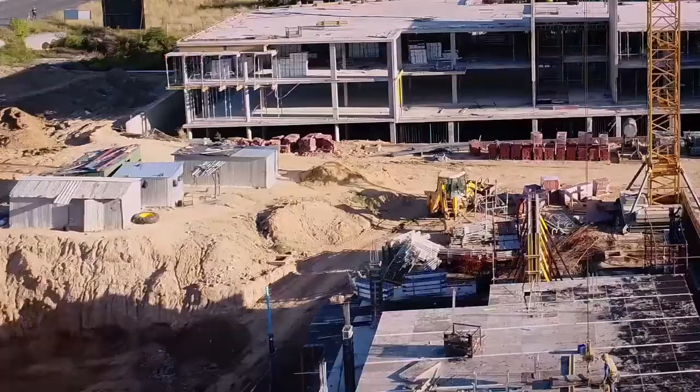Center proudly presents the eGODINI project, a world-class development in the City of Kings. A report of progress. When great minds come together, great things are possible. What started as a dream is steadily becoming a reality, and the meticulous planning is beginning to take shape.

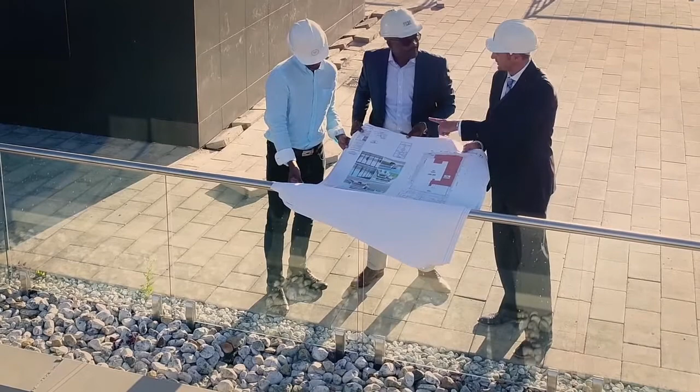The saying goes, Rome wasn't built in a day. Let's hear from the key players as they share with you some insight into the magnitude of this landmark project. My name is Wisdom Siziba. I'm the Acting Deputy Director of Engineering Services in charge of town planning and the project manager for the eGODINI redevelopment project. This project started in 2008 and we went through the processes up to 2017 where we are now implementing the project.

The vision of this project is to unlock the true potential of eGODINI, to create a legacy for Bulawayo, to uplift the community of Bulawayo. We want to create an integrated system in line with the Bulawayo Operative Master Plan, the Strategic Plan and the Public Transport Policy. eGODINI has been neglected at the moment.

The infrastructure needs a lot of upgrade and there's a lot of congestion at eGODINI, and there's inadequate toilet facilities, and it is not user-friendly for the children as well as the disabled that are trying to use eGODINI. It is not very safe because there is no lighting system there at the moment, and even if you look at it, it is an eyesore at the moment. The list goes on, but it doesn't have to be this way.

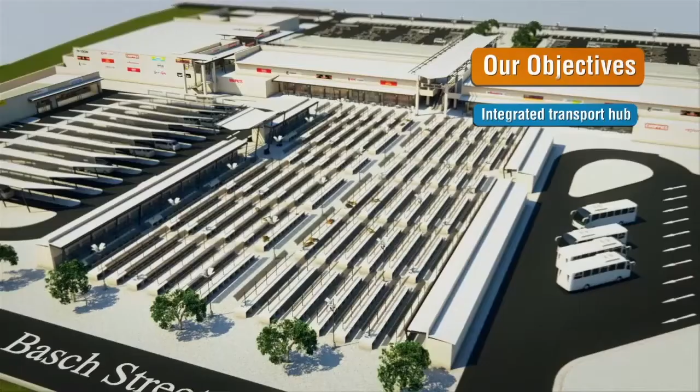There was a dire need to radically transform the site, so there was need to take a bold move and redevelop eGODINI. We are expecting to achieve 7 key points. 1, a properly managed integrated transport hub. 2, an improved local economy. 3, an investment in the city.

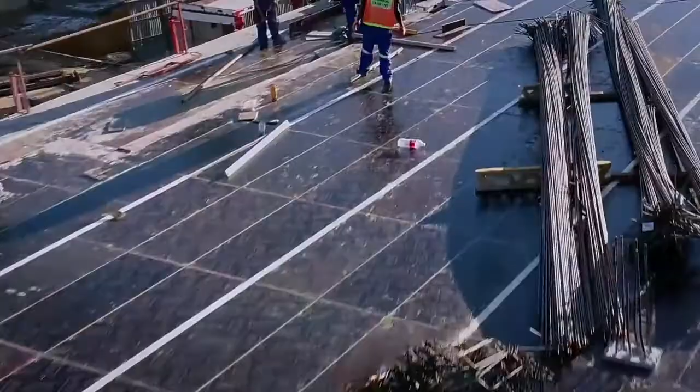4, creation of jobs during and after construction. 5, positive impact on the downstream industry. 6, world-class road travel experience for commuters. The 7th being a better and a livable city for the residents. We needed to find a developer with the capability, the passion, and who shared the vision with us. Hence, we chose Terrace Africa.

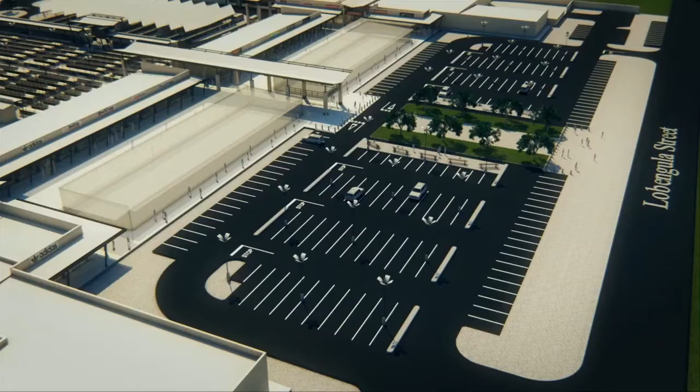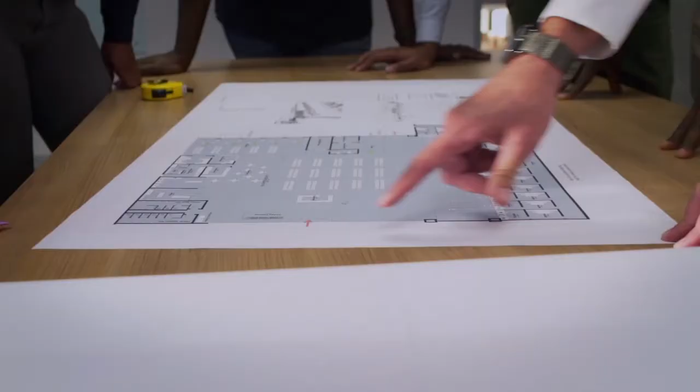The eGODINI project site is on the western fringes of the Bulawayo CBD and is bordered by Lobengula Street on the east, Basch Street on the west, 8th Avenue Extension on the south, and 6th Avenue on the north. The site encompasses a significant open area that is currently utilized by local minibus taxi operators. In terms of our development concept, we conducted a contextual and site analysis which revealed that the site is perfectly positioned to serve the primary purpose of being an intermodal transport hub.

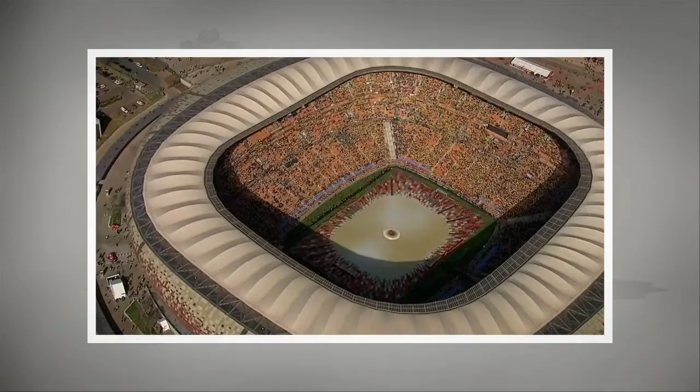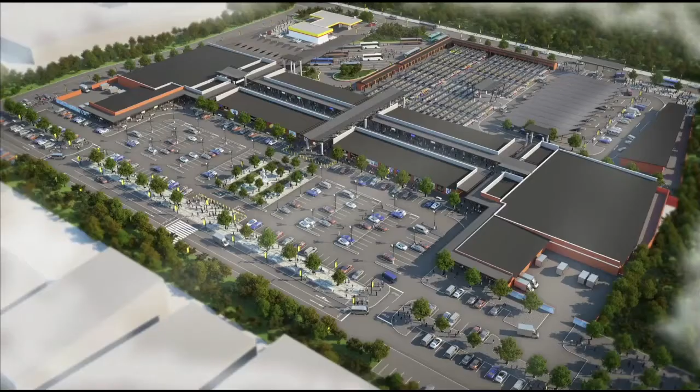When embarking on a project of this magnitude, experience is key. Having worked on the redevelopment of OR Tambo, King Shaka, and Cape Town International Airports as part of the 2010 World Cup infrastructure upgrades, we gained extensive knowledge about the design and operation of some of the best public transport facilities in the world. One would be forgiven for thinking these facilities are merely public transport facilities. However, this isn't the case, as they play a much greater role.

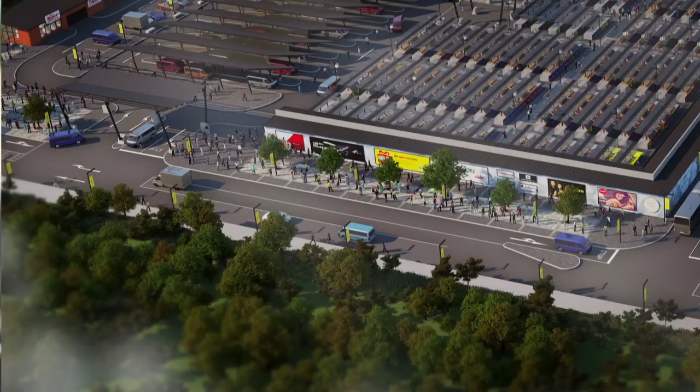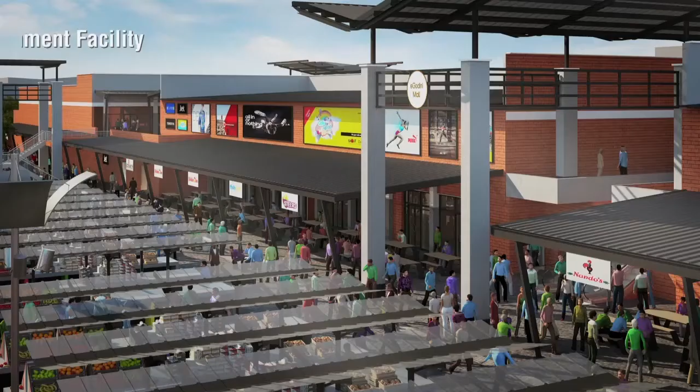They are actually shopping venues and entertainment centers where the public catches airplanes, trains, and buses. This is why so many people gravitate to such places. It is the same vision that we see for the eGODINI development. As a secondary function, the site provides an ideal opportunity to incorporate retail, commercial, and entertainment facilities which will contribute towards the overall commercial viability and success of the redevelopment.

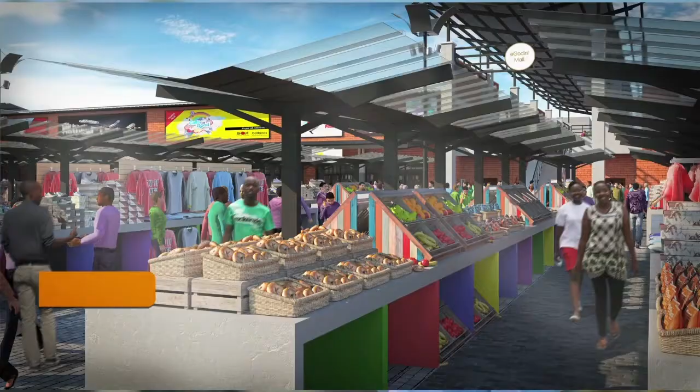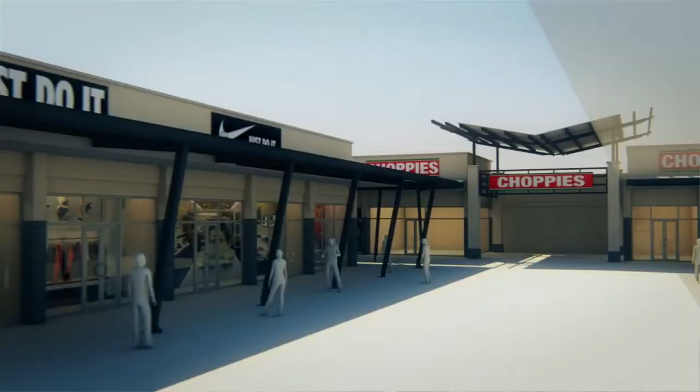So what is our development goal? We intend to redevelop the eGODINI site into a modern, orderly, safe and convenient intermodal public transport hub that will be integrated with a retail shopping center. This will provide public transport users and other visitors to the city of Bulawayo with a fully integrated public transport, retail, commercial and entertainment experience, which will be the main focal point of retail and public transport activity in the whole of Bulawayo.

We have just finalized an almost 3-year development planning process. We now have a project design that will optimally balance various key strategic design objectives. But of course, there have been challenges we have had to contend with. Our very first obstacle was to comprehensively address the fact that technically the eGODINI site is extremely challenging from both an engineering and architectural perspective.

The topographical structure of the site is split into 2 dissimilar levels, the differences between the high and low points being significant and occurring at staggered intervals and elevations. Our next major challenge was how to ensure minimum inconvenience to informal traders and public transport operators at the site, while complying with construction health and safety requirements.

The relative lack of formal employment in Bulawayo means that an increased number of people are now earning a living through informal trade. The council has proposed temporary relocation of informal traders and taxi operators to other sites during construction works, whereafter they'll be brought back to the completed site. We are therefore going to implement a phased development approach so as to bring back informal traders and taxi operators onto site as part of phase 1.

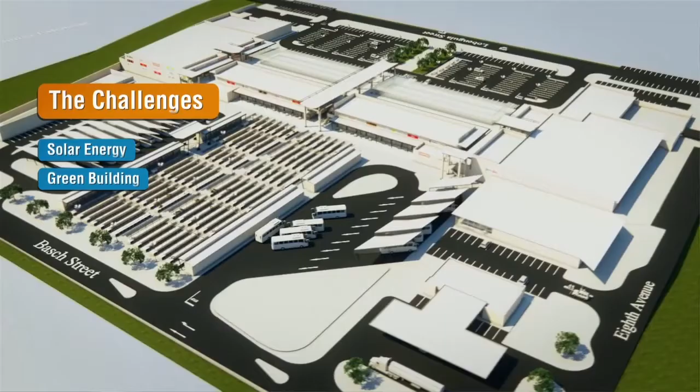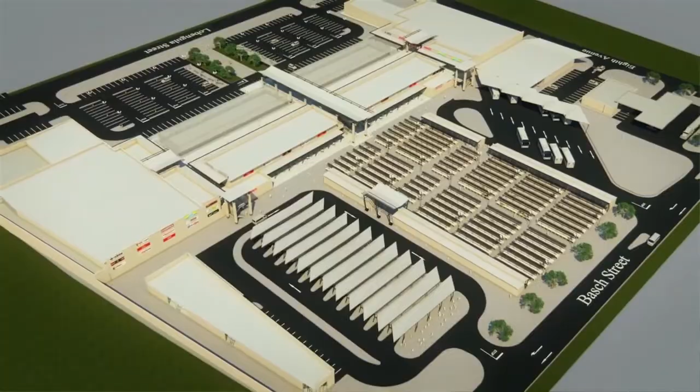Having confirmed a technically feasible design solution for the development, our next challenge was to stress test the financial viability of the technical design solution. The unique combination of the significant capital investment required for the project due to the complex engineering and architectural challenges and the prevailing economic environment can easily conspire to bankrupt any developer of this project.

We therefore undertook more than 2 years of demographic studies to design and assess the optimal financial potential of the site. We now have a detailed understanding of what tenant mix will work in which phase of the development, what market rentals different types of tenants can afford to pay, traffic counts and trends, and why certain existing retail developments are not working as well as they should be.

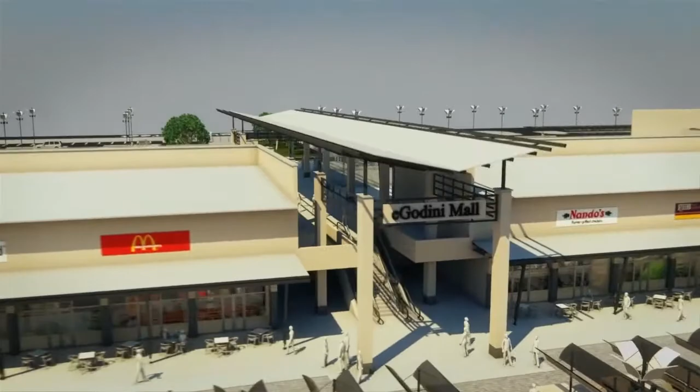This is the intellectual property that we bring to this project to ensure that it is successfully delivered for the residents of Bulawayo. This project is a very special project to us as Terracotta. Our shareholders have jointly developed more than 50 shopping centers in South Africa, creating jobs and changing the lives of hundreds of thousands of South Africans. As professionals from Bulawayo, we want to do something special for our city, the City of Kings.

We were tasked to design a contemporary lifestyle precinct that would easily be integrated into the existing urban fabric as well as articulate the cultural context of Bulawayo. The landmark development needed to encompass 3 distinct facilities: an innovative retail shopping centre, a comprehensive intermodal public transport hub, and an iconic remembrance garden venerating the great King Lobengula.

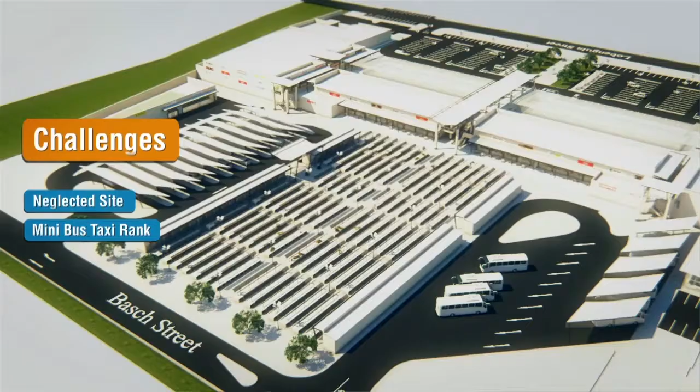The layout for the eGODINI precinct is designed with an historical context in mind, but of course we faced major challenges. A neglected site that has not been sustained for the last few decades. The minibus taxi rank. We decided to formalize a modern, organized and sheltered taxi rank that will provide convenience for taxi drivers and commuters. The informal traders facility, with over 1,100 traders, needed to be relocated to a centralized point. Hence, we strategically positioned the facility to ensure maximum foot traffic and efficient flow of pedestrians.

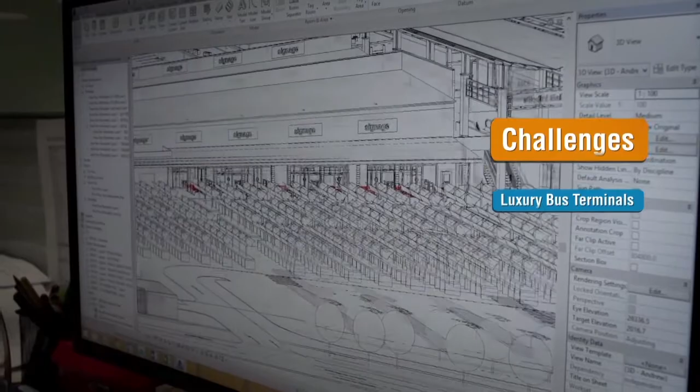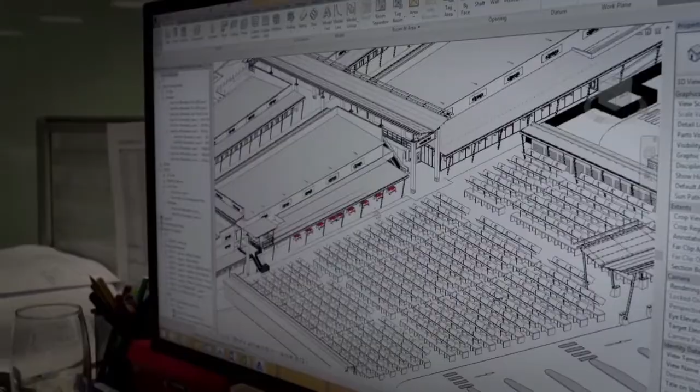The bus terminals. We decided to centralize all intercity and cross-border operators to a single luxury bus terminal with state-of-the-art facilities, a first for Zimbabwe, providing convenient, streamlined access and efficient service. The route planning. It was necessary to redistribute and redesign the public transport service routes, improving the efficiency of traffic flow. The fast food facilities are positioned to get maximum exposure to the general public and easy access to a range of fast food outlets.

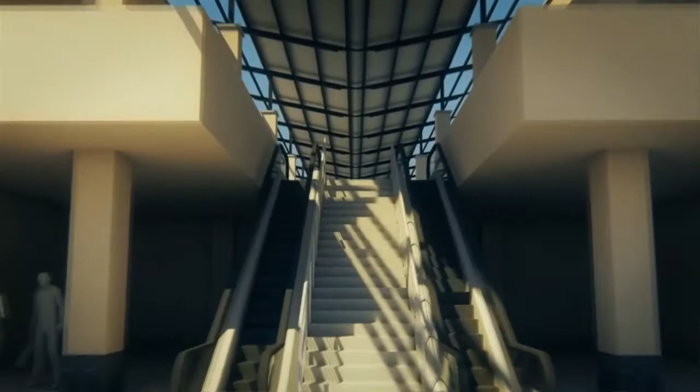The eGODINI shopping centre is located in the heart of Bulawayo. It is positioned on the upper level of the site, allowing for an abundance of natural light, easy access, minimizing design costs, and provides a stylish lifestyle shopping experience. The iconic Nkosi Lobengula Remembrance Garden is a monument with cultural significance for the people of Bulawayo. The design will be spearheaded by the energy efficiency principles and takes into account sustainability and green building philosophy. The ultimate outcome is to see the eGODINI site become competitive and grow a sustainable urban economy that supports quality of life and inclusion of all its citizens.

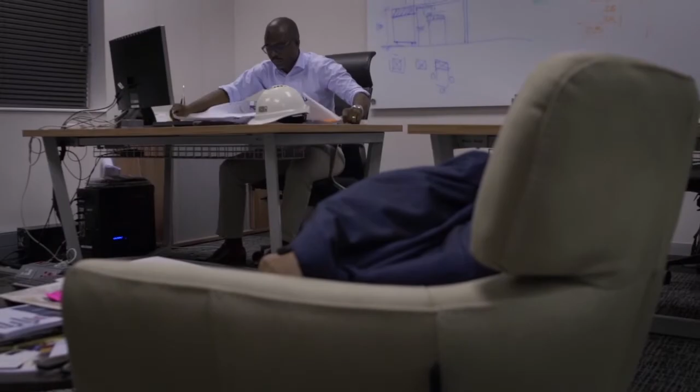My role is essentially threefold. I oversee the civil, structural and electromechanical engineering aspects of the development. The civil scope involves designing the required supporting infrastructure, for example, the platforms, sewer, stormwater and roads. The structural scope involves foundation designs and structural schemes to facilitate the architectural design. In essence, we are designing the skeleton so that the body can support its weight and other forces that act on it. In terms of the electrical scope, power is essential. We need to ensure the electricity requirements of the development are met.

Interestingly, the name eGODINI is a local term which means hole. The current site is in a hole or a cut. Hence, this inspired us to implement the concept of platforms separated and supported by a 4-meter high structural reinforced concrete retaining wall. It's important to note the site conditions and terrain unearth a number of major challenges. Bulk earthworks is the biggest challenge. The site terrain is not flat, as it is sloped with a ±5-meter difference between the highest and lowest points. We decided to adopt a major retaining wall separating the upper and the lower levels of the development. The cut and fill exercise will minimize the volumes of importing backfill material.

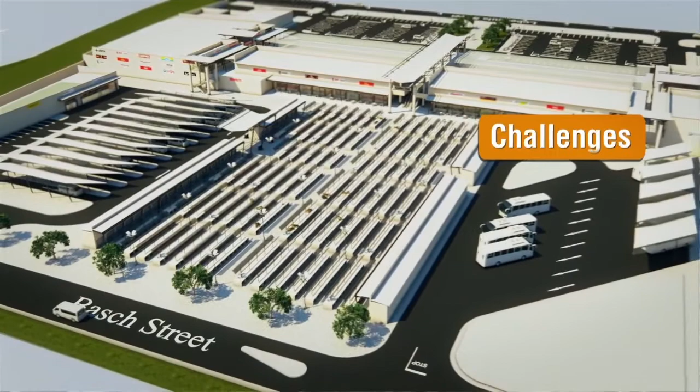Adequacy of water supply is an issue. We have calculated that the current 315mm diameter municipal main feed to the site can support the development. A concern, however, is that the city of Bulawayo faces erratic water supply problems. To combat this, we are sinking bores to feed into the on-site storage tanks. In order to address stormwater management and sewer reticulation, our design entails rerouting the current scheme. The total length of water, sewer and stormwater reticulations is 4.7 kilometers, and with Barbourfields Stadium perimeter being 540 meters, the new reticulation is 9 times the perimeter of the stadium.

Stormwater will be managed by a combination of surface flow and an underground piped system. And we have accounted for solid waste management, which will be collected from designated areas on the premises by municipal trucks on a daily basis. Other issues such as sustainability, green solutions, energy efficient lighting, air conditioning and water heating have all been addressed to ensure this landmark development is engineered to perfection.

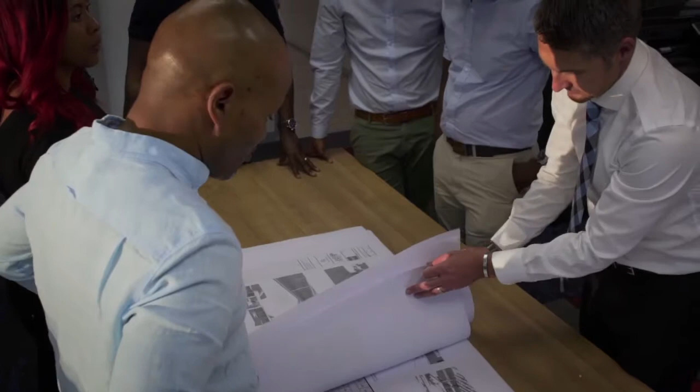In a nutshell, we are responsible for designing sustainable mechanical building services for the development, namely heating, ventilation and air conditioning systems, fire protection systems, and water services, thus drainage and water supply systems. There are 3 major challenges we face. Firstly, the unreliable rainfall patterns for the city. Secondly, total owning costs for the plant, which includes capital and running costs. The running cost may go up due to high cost of electricity and reliability of supply.

And lastly, maintenance. We carefully considered these key issues and addressed these problems using the primary principles of sustainable building services design for HVAC and water services. And this we did by reducing the carbon footprint of the project, reducing potable water usage, building using sustainable materials, design that is able to cope with future climate change, giving a positive contribution to the community, and lastly, sustainable in operation.

With regards to the fire engineering, our aim is to provide the following key benefits: life safety for shoppers, shop owners and workers, property safety, minimize disruption to business operations, minimize damage to the environment, and of course, easy access for fire and rescue teams. We've heard from the professionals. Let's see what the people think.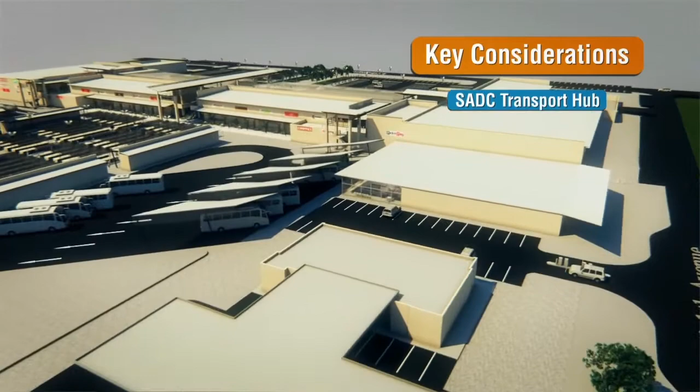Currently, there is no real bus station. It's fairly chaotic. Buses just stop in random places on the street. It's not ideal. There needs to be a change. What would make a perfect bus station? A transport hub for the SADC region. This development will enable easy connection for passengers. For example, passengers arriving from South Africa will be able to easily transit to other neighboring countries, such as Botswana, Zambia, Malawi, Namibia, Mozambique, and even Angola.

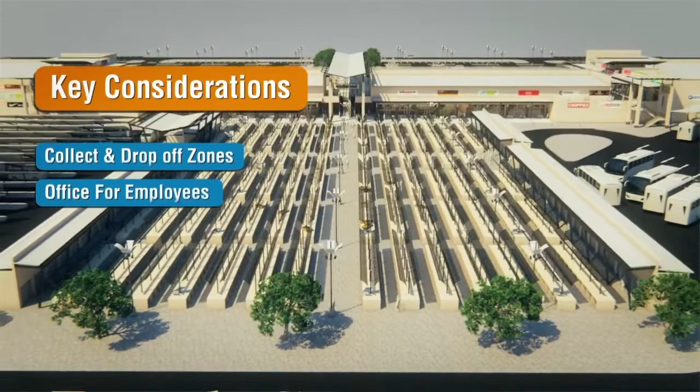Simple, practical things. Proper section for buses to collect and drop off passengers. An office for the employees. A ticketing booth. A check-in counter. A departure lounge. A luggage section. Things that will make it convenient and comfortable for our passengers. Clean facilities are a must. Security to make sure everyone is safe. And of course, you can't go anywhere without fuel.

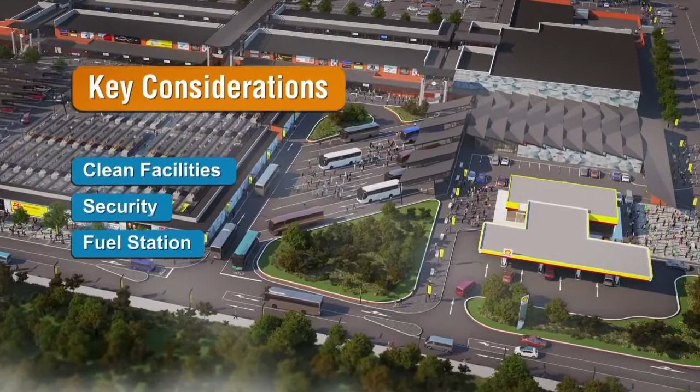Hence, a fueling station that is close by so that we at Mzansi Express can offer a better customer experience. These are the great things that this eGODINI development has to offer, which is the reason why we at Mzansi Express are looking forward to the future.

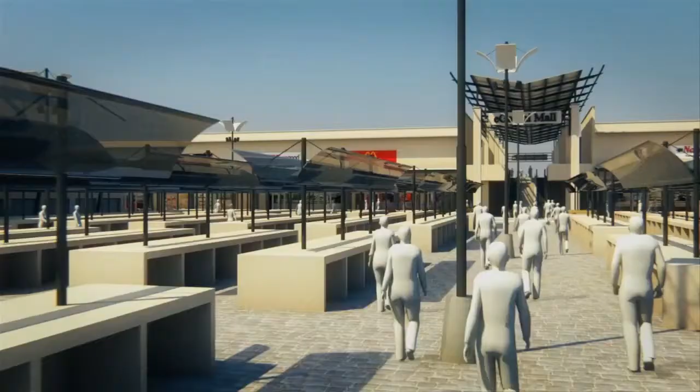Our wish for Bulawayo is to be a world-class city. eGODINI project is a move towards achieving a world-class status. eGODINI project is indeed a landmark project for Bulawayo and Zimbabwe. Immense progress is being made at a steady pace. The relocation plan for vendors and commuter omnibuses is in place. Survey has been concluded to consolidate all stands. The development master plan has been approved.

Detailed architectural and engineering drawings are at an advanced stage, and we now expect to do site handover in the near future. This is quite an exciting time, and I feel very proud to be part of such development in the great city of Bulawayo. Certainly, this is an ambitious and landmark project that will no doubt have widespread benefits for all our taxi operators, daily commuters, informal traders, luxury bus travelers, visitors, and residents of the beautiful city of Bulawayo.

We need to be conscious of the fact that the development of this magnitude does not simply appear overnight. This is not a sprint. This is a long, complex journey that requires dedication, planning, and hard work. We are heading in the right direction and well on our way to turning the dream into a reality.

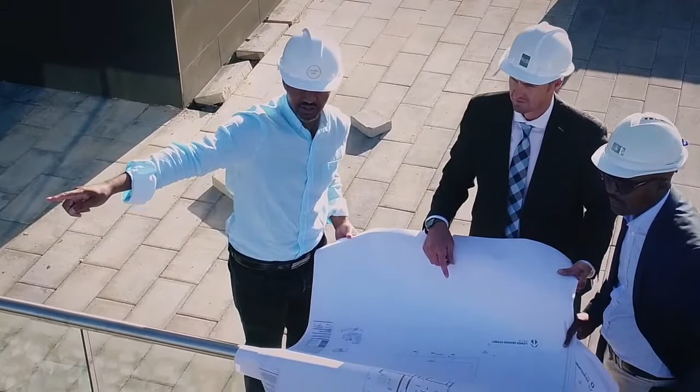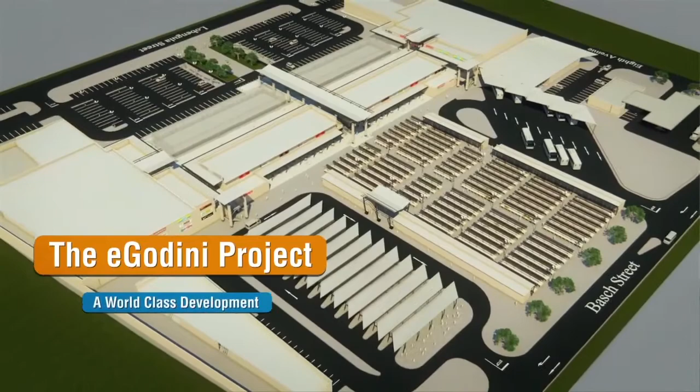It is Bulawayo's time. A site with a complex set of problems, a team with a bold set of solutions, and an iconic project that will change the lives of the people and establish Bulawayo as a world-class African city. The eGODINI project, a world-class development in the City of Kings. Proudly presented by Terracotta.

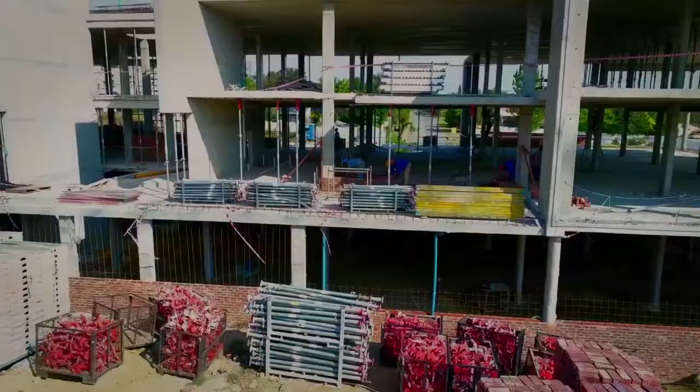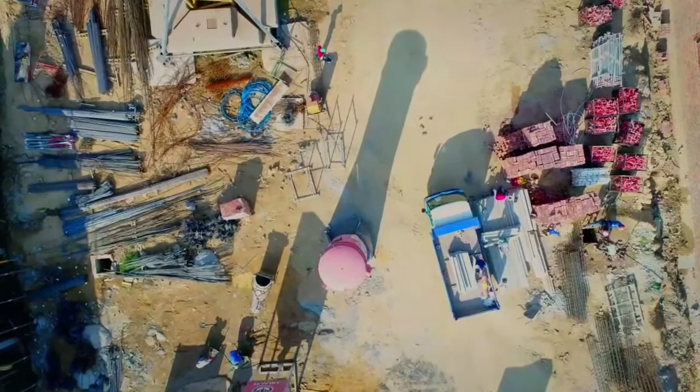Terracotta proudly presents the eGODINI project, a world-class development in the City of Kings, building a legacy by changing lives and impacting the community for the better. Bulawayo is the second largest city in Zimbabwe and is the industrial capital of the country. The city is strategically located at the center of the road and railway networks of the SADC region. It is therefore a crucial interconnecting city for all forms of transport, interlinking all major economic hubs in Southern Africa.

The eGODINI site is located in Bulawayo Central Business District. The site is approximately 56,228 square meters of massive potential. Our aim is to unlock that potential to the benefit of every stakeholder. Currently, the site is used as the main local minibus taxi rank for all taxis operating into and out of the CBD, with 1,047 informal traders, 2,015 minibus taxis, and businesses operating from more than 15 permanent buildings across the site. The problems cannot be ignored.

The site has been neglected over several decades. No infrastructure upgrades or maintenance. Informal traders, their stock and customers are exposed to unhygienic conditions. No protection from weather elements. No on-site storage facilities for informal traders, increasing the cost of doing business. The taxi rank is disorganized and chaotic. No clear demarcation for pickup, drop-off or route areas.

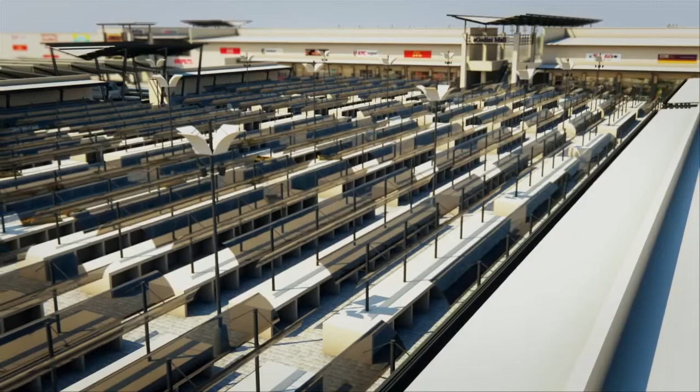Our objective is to redevelop the existing eGODINI into a modern, safe, and convenient intermodal public transport hub, combined with a retail shopping mall that collectively will provide public transport users and other visitors to eGODINI with a single and fully integrated public transport, retail, commercial, and entertainment experience. Our motivation is to touch the lives of every individual by improving the site. To get to the heart of the matter, we spoke to the ordinary man on the street and carefully considered the problems they face. This is what inspired the entire design.

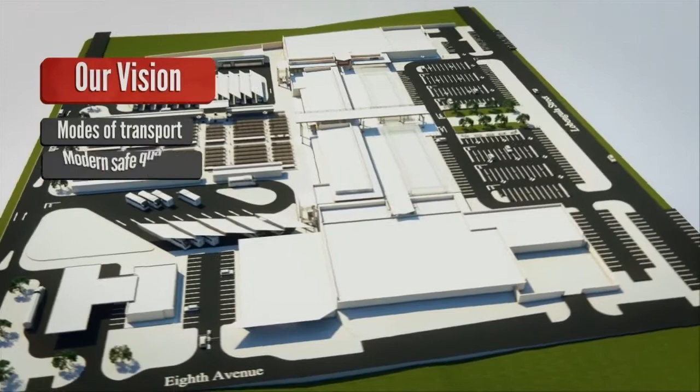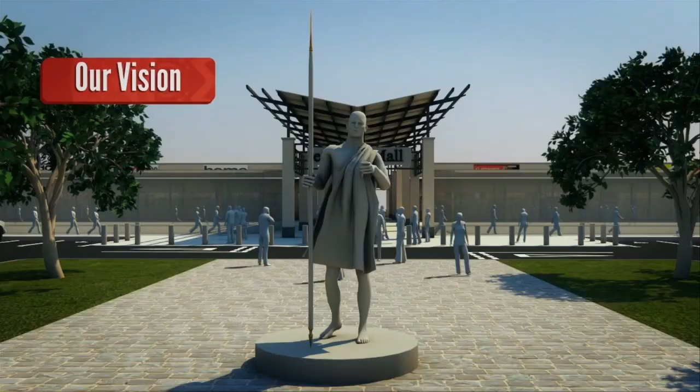So what is our vision? Let's start by integrating various modes of transport. Let's create a modern, safe and quality environment for all users. Let's provide retail, commercial and entertainment experiences. We want to link eGODINI to the rest of the Bulawayo CBD and create an exceptional city monument, the Inkosi uLobengula Remembrance Garden, which will include pristine pedestrian walkways, revitalized landscaping along Lobengula Street, unique street furniture, public art and directional signage.

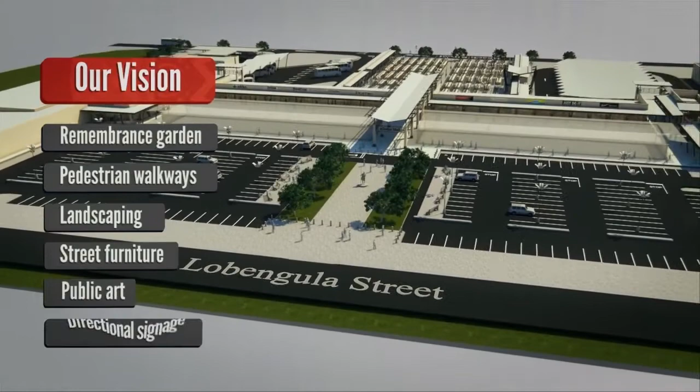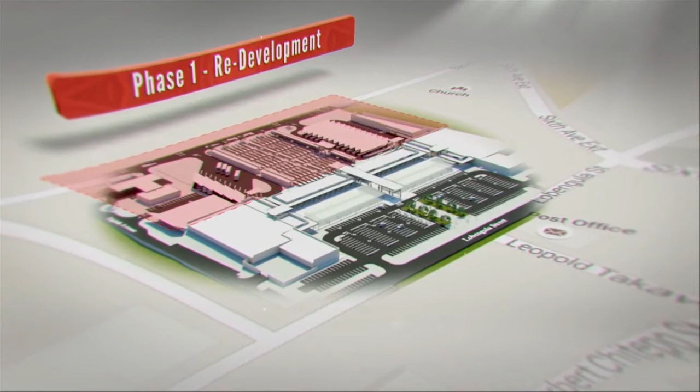Let's move forward together. This is our vision for progress. Phase 1 of the redevelopment takes place at the basement level of the site. 25,000 square meters make up the transport hub and comprises 4 vital components.

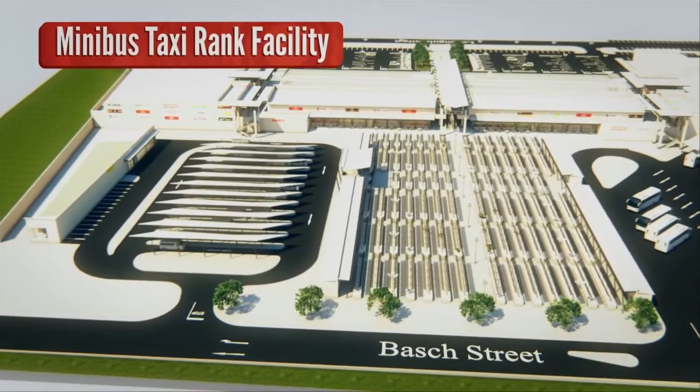Designed with a specific idea to benefit commuters and taxi operators alike, the first component of Phase 1 of the redevelopment is the new and improved minibus taxi rank facility. This consists of a revamped taxi rank with a handling capacity of 75 standing taxis, a taxi service and tire fitment center to maintain taxis, a covered section providing protection from the weather elements.

It will be clean and safe with toilet facilities. Queuing for your desired destination is made simple and organized with signage to indicate taxi routes. Plus, our plans include creating a new petrol station for taxis and luxury buses alike. The facility has also been designed so that fumes can disperse safely. Our aim is to make things convenient, safe and efficient for the public and taxi operators.

We recognize informal traders play a pivotal role in our local economy. Let's give them a platform to flourish. The second component of Phase 1 of the redevelopment is the new and improved Informal Traders Facility. The Informal Trading Facility is the most strategically located facility in the entire development, positioned for maximum exposure to passenger foot traffic.

The facility has a capacity of 1,100 semi-covered stalls, on-site storage facilities and toilet facilities. It is clean and safe with adequate protection from the natural elements. Our priority is to provide informal traders with better facilities and a chance to make their businesses more successful.

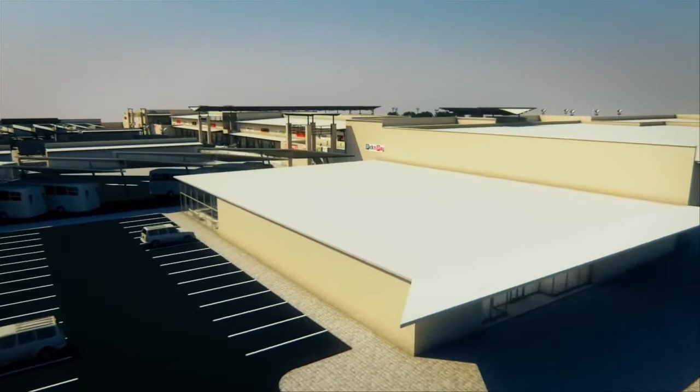The third component of Phase 1 of the redevelopment is the Luxury Bus Terminal Building, the BTB. The BTB is a first for Zimbabwe, designed along the lines of Joburg Park Station to provide our long-distance bus commuters with an exceptional experience.

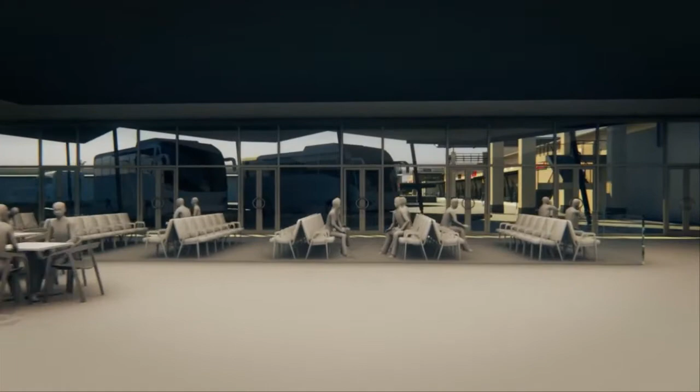This modern luxury bus facility can handle up to 25 luxury buses with a dedicated pick-up and drop-off zone, modern glass facade, electronic check-in counters, air-conditioned passenger arrival and departure lounges, and a secure bus platform. We will deliver a top-class experience and take luxury bus travel to the next level.

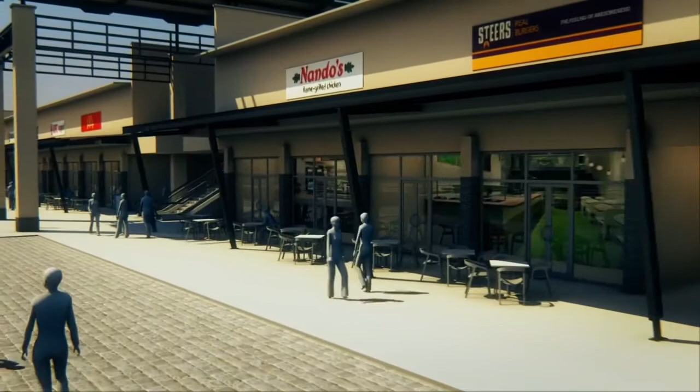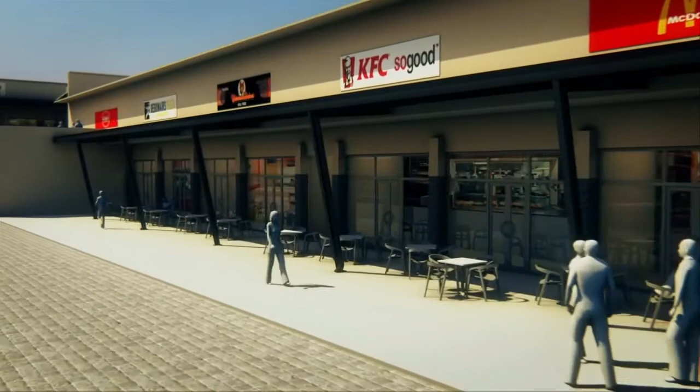Everybody needs to eat, which is why the fourth component of Phase 1 of the redevelopment is the fast food retail facility, which is ideally located next to informal traders, the minibus taxi rank and the BTB. It provides convenience for travelers and traders, catering to a wide range of tastes with the best in local and international fast food brands.

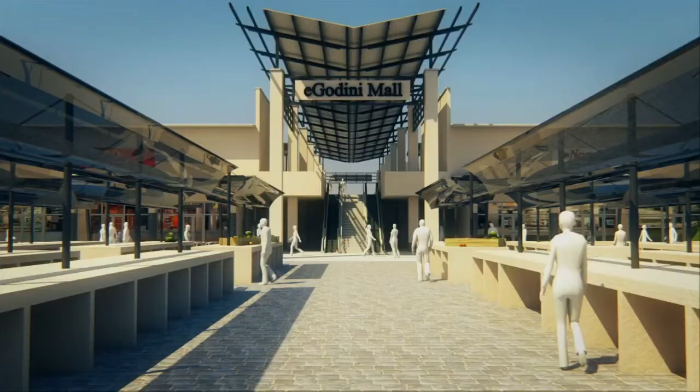Phase 2 and 3 of the eGODINI project is on the upper level of the site and consists of 3 components. Introducing the eGODINI Mall. It's time to experience an impressive 18,000 square meters of retail bliss. This beautifully designed modern retail shopping center is accessed from Phase 1 via escalators, stairways and lifts.

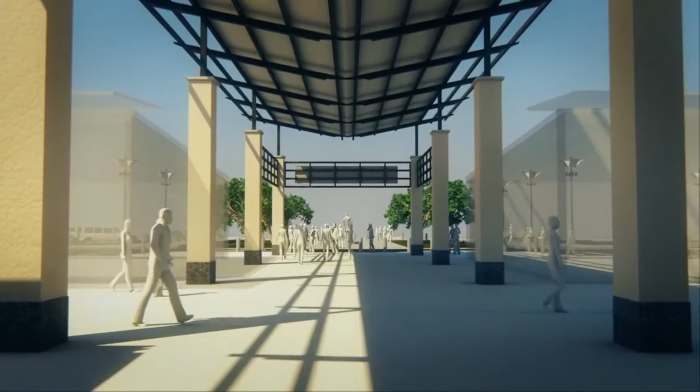The shopping center will be anchored by 2 major local supermarkets taking up 3,000 square meters of retail space each. There will also be banks, bureaux de change, cell phone shops, pharmacies and of course the biggest clothing brands, both local and international, all located under one roof. Shopping has never been so convenient.

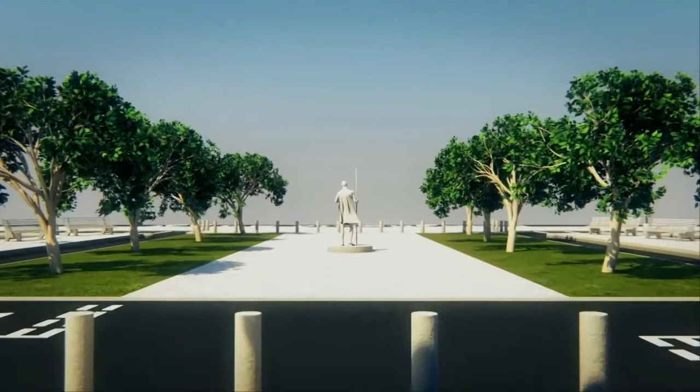Finding a parking space will not be a problem as we have a capacity of 400 paid parking bays. The parking area is safe, secure and organized for your convenience. Finally, we needed something that would bring the community together. Hence, we designed the iconic Inkosi uLobengula Remembrance Garden.

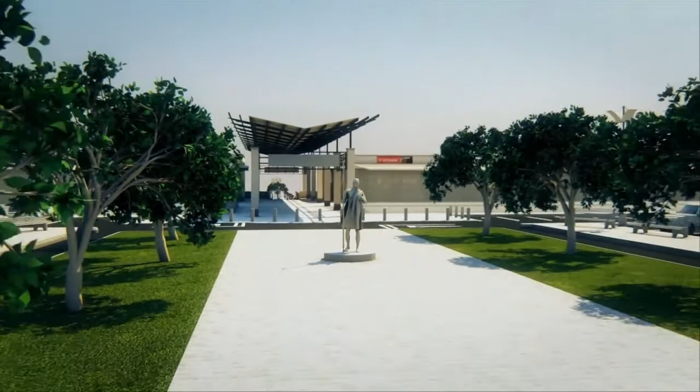Symbolically located along Lobengula Street, this serene and beautiful monument celebrates the rich African history and culture of Bulawayo and adds the finishing touch, coup de grace, to the eGODINI project. Without doubt, the eGODINI project will positively benefit all of our taxi operators, daily commuters, informal traders, luxury bus travelers, visitors and residents of the beautiful city of Bulawayo.

We look forward to building a lasting legacy of progress and development by changing lives and impacting the local community for the better. This is our promise, a firm commitment and contribution to Zim Asset. With over 1,000 jobs to be created during the construction phase and over 3,500 informal traders, retail shop employees, taxi drivers, rank marshals, luxury bus drivers and personnel to be gainfully employed at the eGODINI Mall post-construction, the city of Bulawayo will never be the same again.